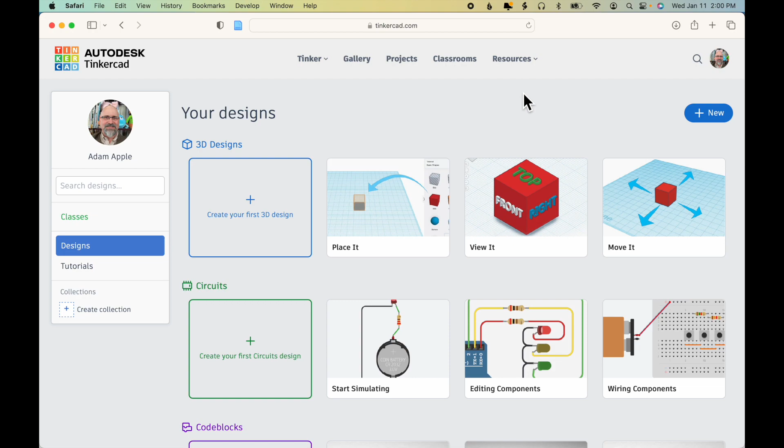Log into the class Tinkercad page, click Resources, Learning Center, View All. Scroll down, and this week you'll be creating earrings, two different kinds of earring.

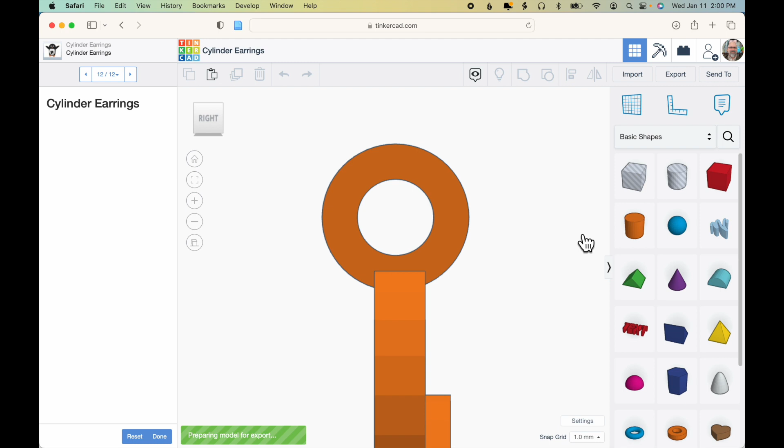Once the designs are finished, you can reopen them and click Export and STL to export an STL version of the file. Then click the Tinkercad logo, then click Resources and Learning Center and View All to go back in. Scroll down, click the next exercise, Review, and Export STL, and then back out of there.

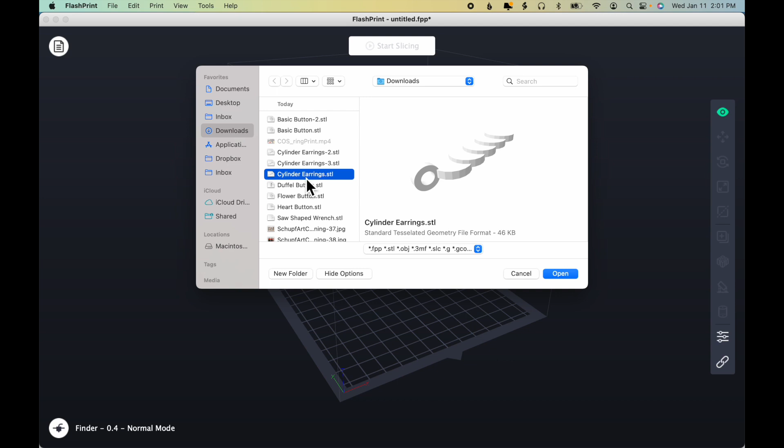Now open FlashPrint, choose File, Load File, and find one of the files that you just downloaded. In this case, the cylinder earring, and click Open. Now I'll click Move on Platform Center and close that and scroll in and examine the model.

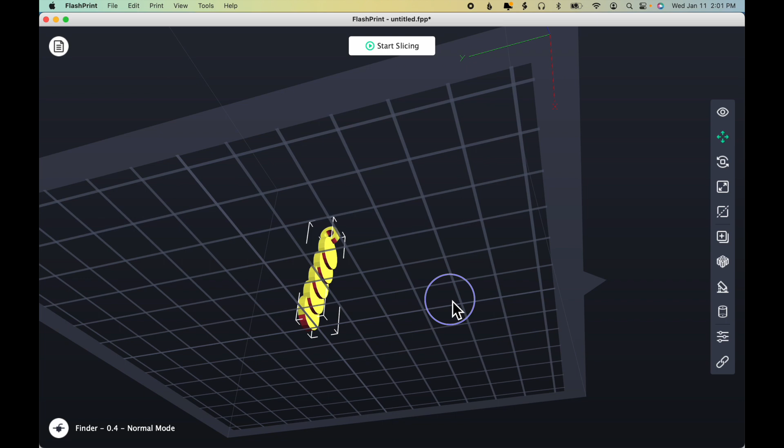Obviously we're going to need supports for this, because as I'm scrolling around, you can see that the bottom of each of these cylinders is red, and also the bottom of the loop at the top and the bottom down there.

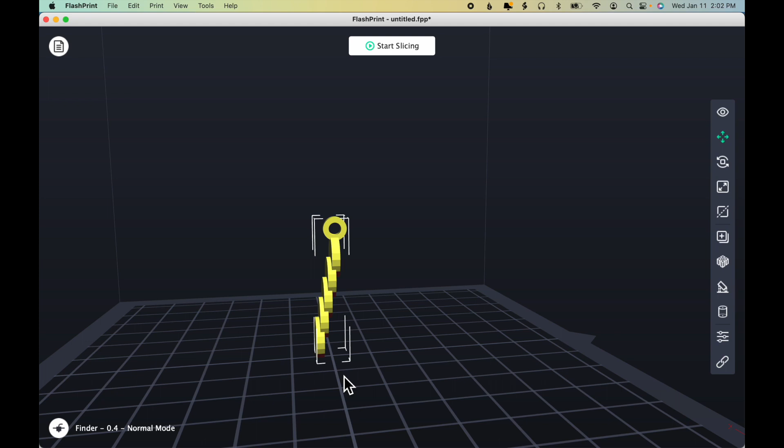So I'm going to need supports, and because I'm using supports, I'll need a raft as well. But even if the model were just straight vertical without these overhangs, I would still need to add a raft, because the portion of the model that's connecting to the print bed is too small and the model's too tall for the print to have a high likelihood of succeeding. More likely the print will come loose at some point during the printing process and be knocked over.

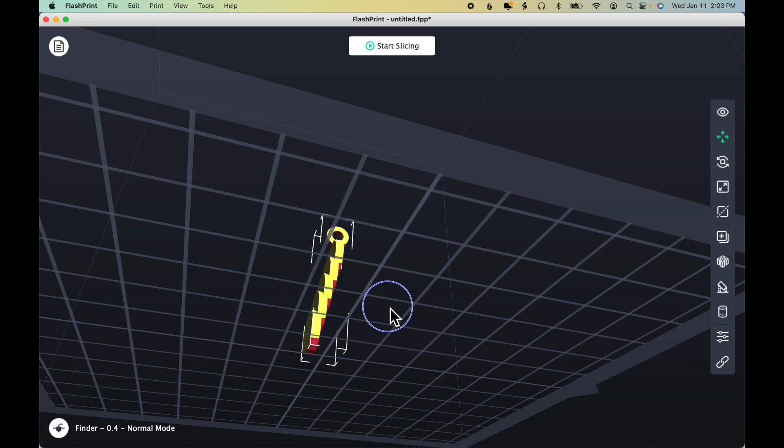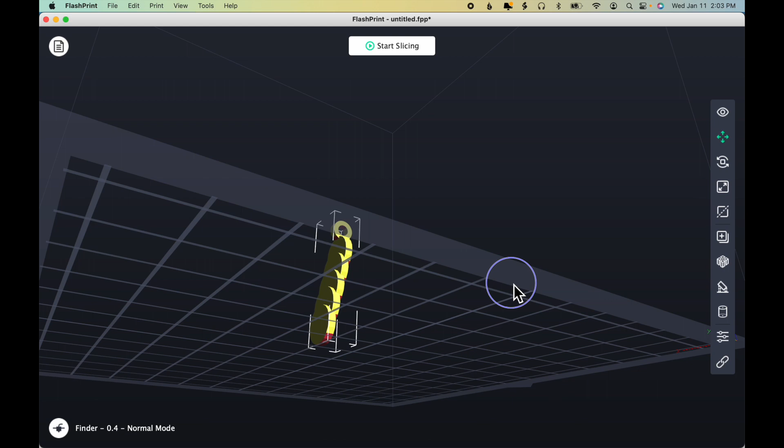So because I'm going to be adding a raft and supports at the bottom, I'm going to actually click Move and move the model up 3 millimeters so that the whole thing is in midair, because otherwise just the very bottom tip of the model would be touching the print bed, and that together with the raft and the supports may end up marring that surface. So I'm going to raise it up a little bit.

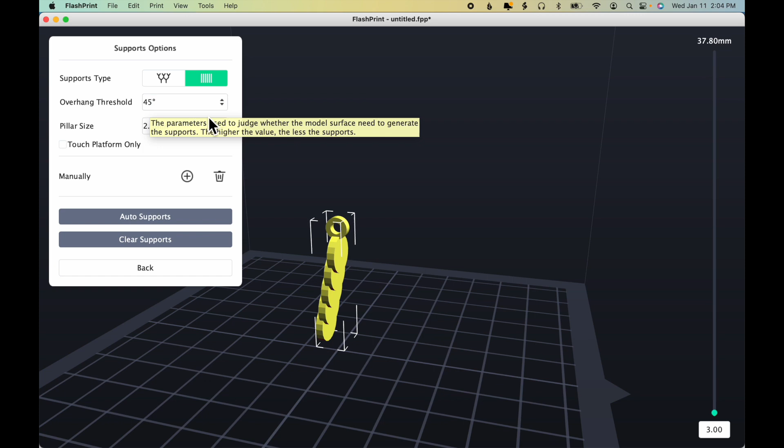Then I'm going to come over to supports and choose pillar supports. I have a threshold overhang of 45°. I'll click auto supports, and you can see that lots of supports are added. And that's fine. They'll all come off, and the model should be nice and clean afterwards.

Now there's no support inside this loop, even though the center portion is an overhang. And that's because if you imagine how the model is built layer by layer on both sides, at some point it's going to be close enough that the printer will just move right across that opening. There might be a loose piece of filament that hangs down, but you'll be able to trim that with an X-Acto knife quite easily.

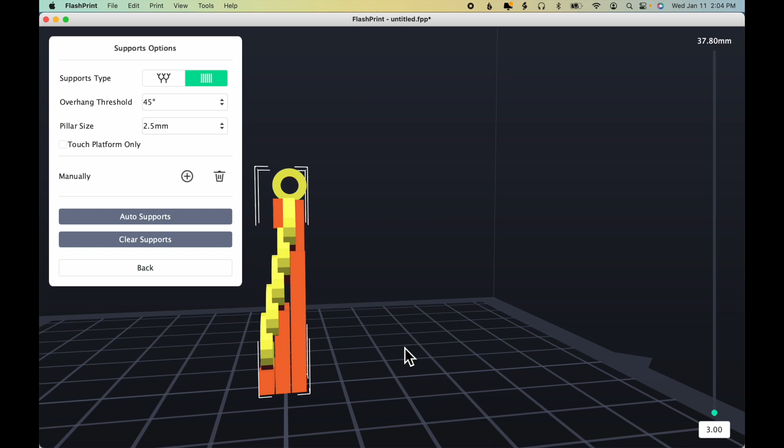So we'll keep at what we have here, click back, click Start Slicing, click Restore Defaults to make sure, again, there are not any hidden changes that will surprise us.

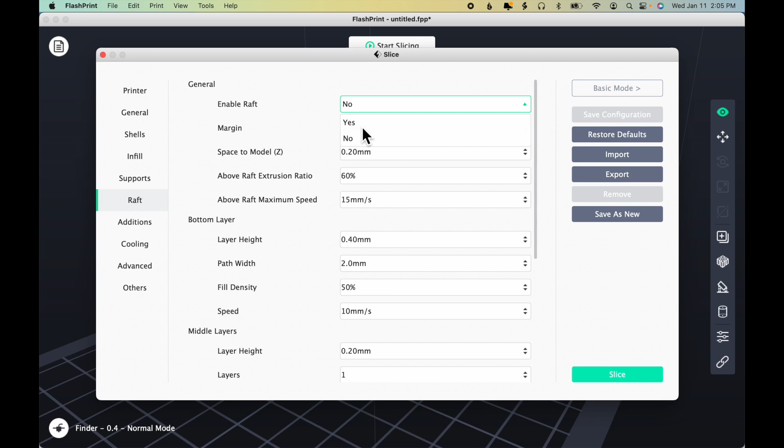And then I'm going to go down to Raft and click Yes. I would like a raft. And on supports, I'm going to increase the space to model XY from 0.35 millimeters to 0.45 millimeters. And I'm going to increase the space to model Z from 0.2 millimeters to 0.3 millimeters, and I'm going to increase the top solid layers from 0 to 2, and then click Slice and Slice Preview.

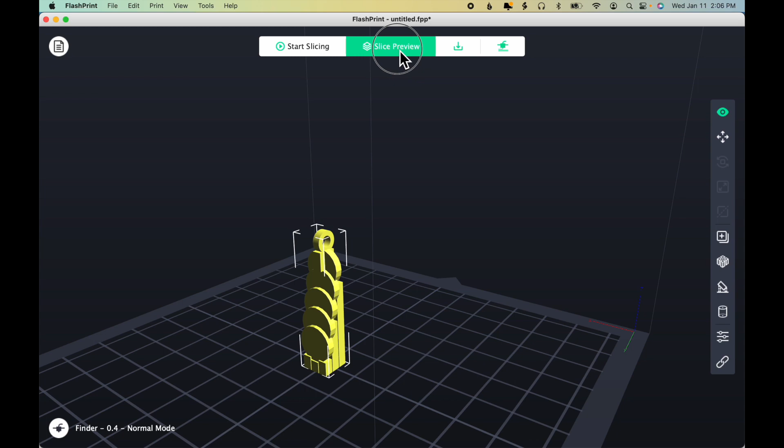So you can see we've got our supports, and we have a raft to hold everything nice and firmly to the print surface. And if I look at the model sideways and zoom in, you can see the space between the model and the support.

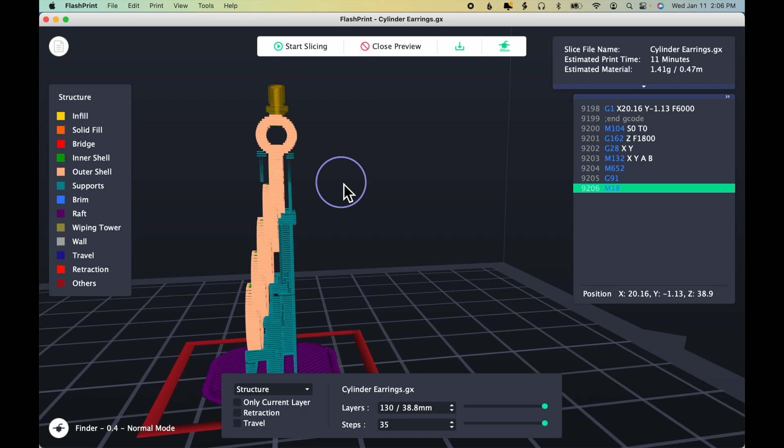That's the space to model X and Y, so the side gap. And the space to model Z is the space from the top of the support to the bottom of the model where it's touching. And you can also see these horizontal lines. Those are the solid top layers that we're adding.

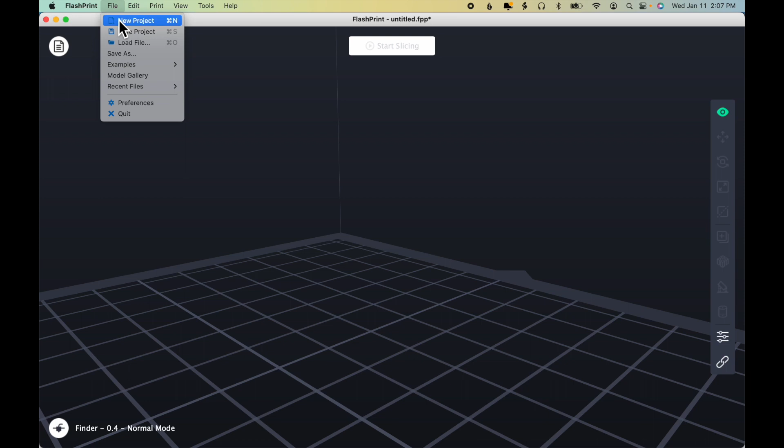All right, now we'll download the model and print it. Click Close Preview. I'm going to click Edit, Delete, and then File, Load File, and look for the second earring model that I downloaded, the twist earrings, and click Open.

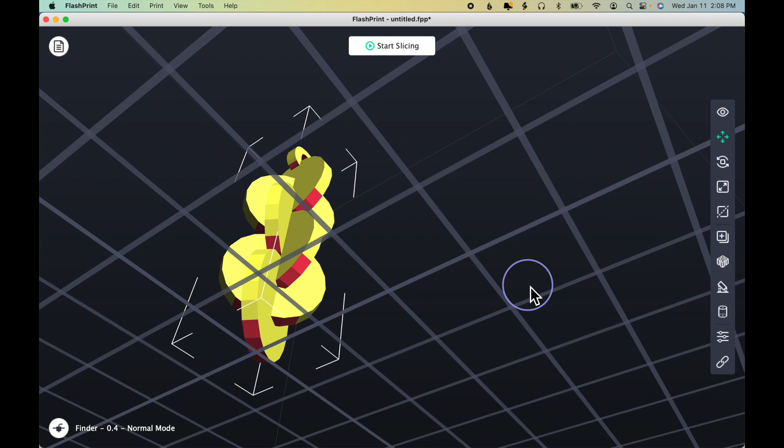Then Move on Platform Center. Okay, and now I'm going to rotate and examine the model. So we see right away that we have a similar problem as we had with the last pair of earrings, that there's lots of red areas, and those are all going to need supports.

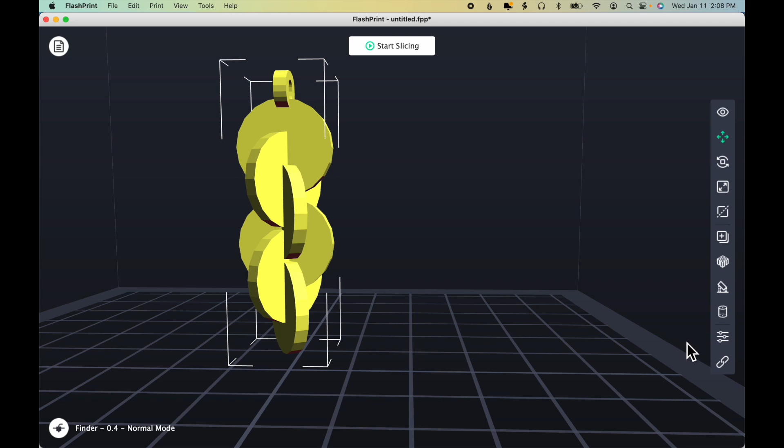So I'm going to do the same thing this time. First, I'm going to click Move and bring it up 3 millimeters, and then click Supports, Auto Supports. Take a look at those, make sure there's supports everywhere that I need them. All of the spots that I saw the red markings.

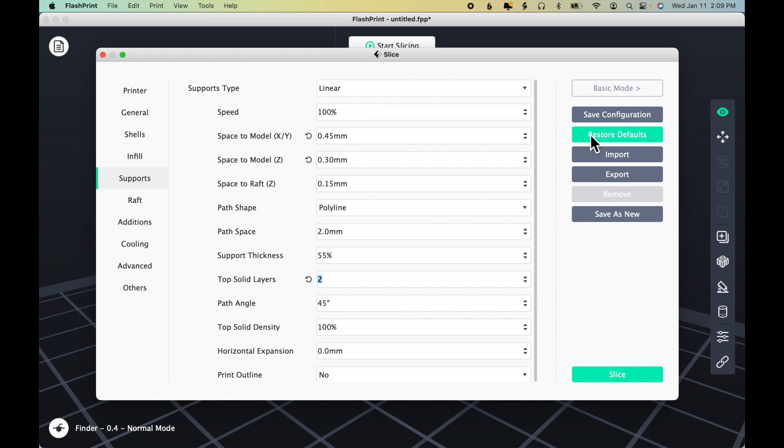Okay, then click back. Start slicing. Now, it remembers the settings that I had from the last pair of earrings that I sliced. So I could just click Slice here, or if you're not sure, you can always click Restore Defaults and then make all of the adjustments that we made for the last pair.

I'm going to keep everything the way it is and click Slice and Slice Preview. There's our model with all the supports and the raft at the bottom holding it in place. That's an 18-minute print.

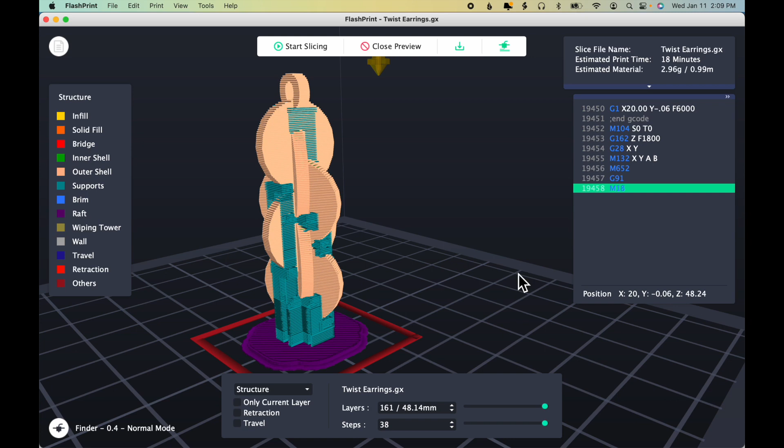Download to a thumb drive, plug into your printer, and print. Then take photos of your printed models and post them to the corresponding discussion topic in Brightspace.